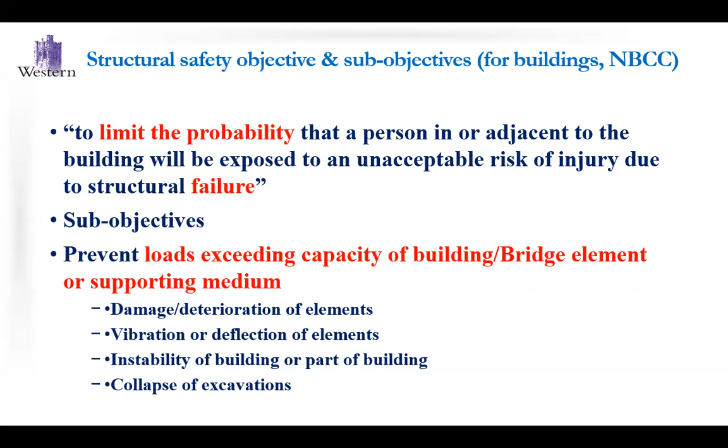National building codes are most often focused on structures, or loading on structures, rather than foundations. I think the new version, NBCC 2025, will include many more things related to foundations. I'm going to only talk about the structure part, and remember that we are often talking about the structural element rather than the structural system, because the structural system is much more complicated than a structural element.

Okay, so the key points for calibrating a design code are three. You need to identify the limit state function. So what is the limit state? Capacity versus demand, resistance of a structural member versus load effects on a structural member. That's the limit state, okay? We need the selection or assignment of probability models of random variables. In other words, we need to state the distribution of a random variable.

For example, wind speed, how it is distributed. We cannot precisely predict the extreme wind during the year, so we must somehow get data and assign the distribution. The third task in design code calibration is we need to set an objective. Okay? What is the objective? The objective is a reliability index or tolerable failure probability.

A long time ago, one of my colleagues corrected me. I cannot say target failure probability. We are not targeting failure. We are getting a tolerable failure probability.

An illustration of those three is shown here. You have factored design load less than or equal to factored design resistance, R being resistance, L being load. You can think of this curve as representing the load effects and this one the resistance. When you pull these two curves away from each other, the failure probability decreases. When you get these two close to each other, the failure probability increases.

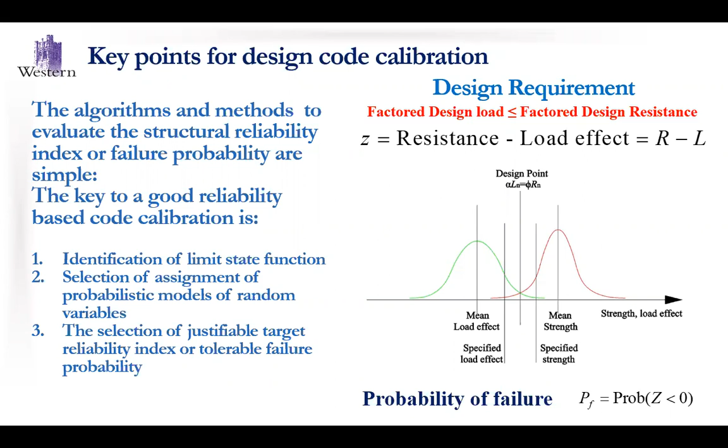How to calculate this probability of failure is a little bit more scary. If load and resistance are defined by this limit state function, the chance of failure, if they are normally distributed, can be expressed this way. This represents the mean of resistance, mean of load effects, standard deviation of resistance, standard deviation of load effects. Beta is known as the reliability index.

Nothing is that easy in life. Sometimes you have a log-normally distributed random variable. In case you have log-normally distributed resistance and load effects, the reliability index can be calculated approximately by this equation. One thing you observe is that the reliability or safety of your structure is controlled by the coefficient of variation of load effects. That's important. Of course, it is also controlled by the mean values. Mean value, we have better control of, perhaps. The coefficient of variation, we don't know how to deal with, and we need to figure it out.

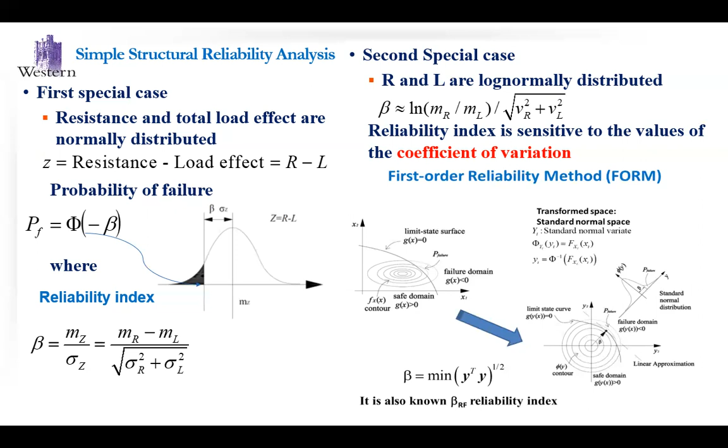This plot shows a more sophisticated approach to calculate the chance of failure. Details of that I will not talk about. Essentially, you have a limit state function. You are in a space which is not normal, and you map to standard normal space, and in standard normal space, you figure out the distance called beta, the reliability index, and use that as a measure of reliability. As long as we understand this beta, we are okay.

If you do not like thinking analytically, you can think of it as follows: you have dead load, you have dead load renovation, so your dead load changes. On top of that, you have sustained live load, snow load, changes in live load, and wind load. You put all of them together and repeat this process for a long time, let's say 50 years, again and again, and you figure out the chance of exceeding the maximal design level or a specified resistance. You do this using the Monte Carlo technique. We are not gambling, okay? This is simply a numerical exercise to figure out the chance of failure.

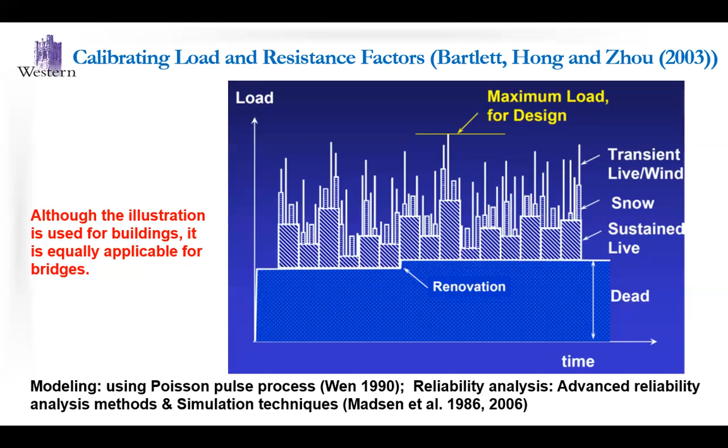For example, for the old NBCC, the calibration was carried out by Bartlett, Hong, and Dr. Zhou, and the load factors were implemented, I think, in 2005. Calculating these involves a lot of mathematics, one of which is the Poisson pulse process, shown here. You need a mathematical model to do the simulation, and once you've done the simulation, you can calculate the chance of failure.

Now let's focus on the limit state function with a bunch of random variables: dead load, live load, wind load, earthquake load, and so on. The design requirement is that the factored resistance must be larger than or equal to the factored load. The third thing needed to carry out reliability-based calibration is the target reliability index. Here, the target reliability index is 3.5 with its corresponding failure probability.

When we translate that, we need to consider that the dead load remains constant during the service period. So the annual failure probabilities for the first, second, third year are partially correlated, because the dead load remains the same, although it's unknown. Translating 30 years to 50 years, 3.5 becomes 3.36. So roughly, a reliability index of 3.0 is used for the National Building Code of Canada calibration. For the bridge design code it is slightly different: 3.5 for 75 years.

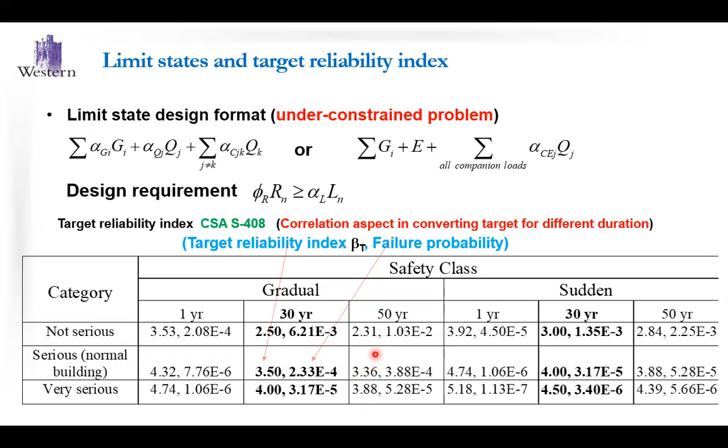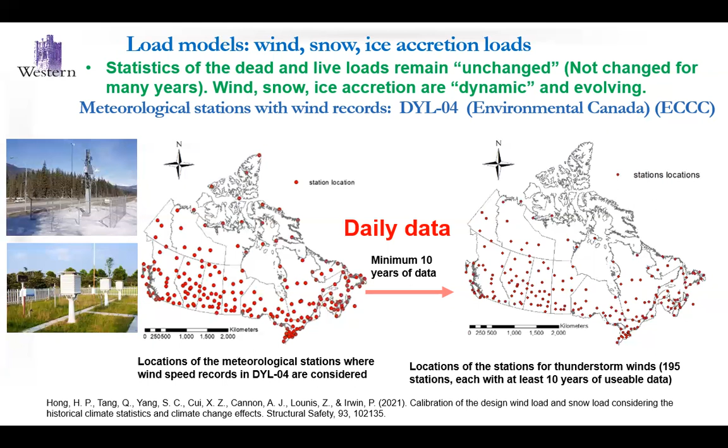In this case, DYL is daily data. In other words, you have only one data point for each station during a day. You can also have HYL01, which is hourly data, and these are the stations. Usually there are more than 250 stations that have sufficient data you can use, because we want to carry out extreme value analysis, and we need at least 20 years of usable data. Without that, there is huge uncertainty in the assigned distribution for wind speed.

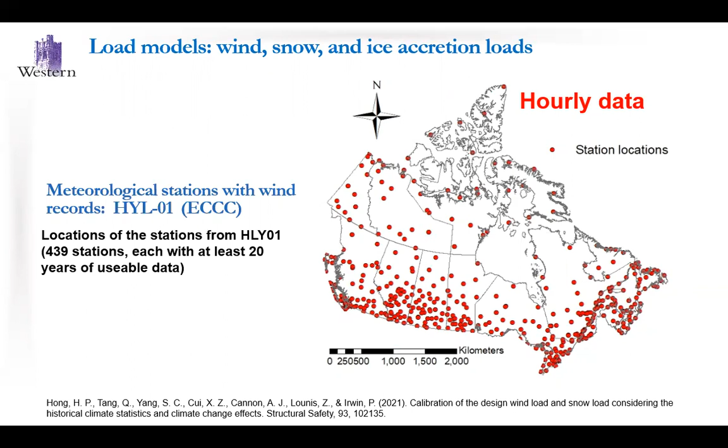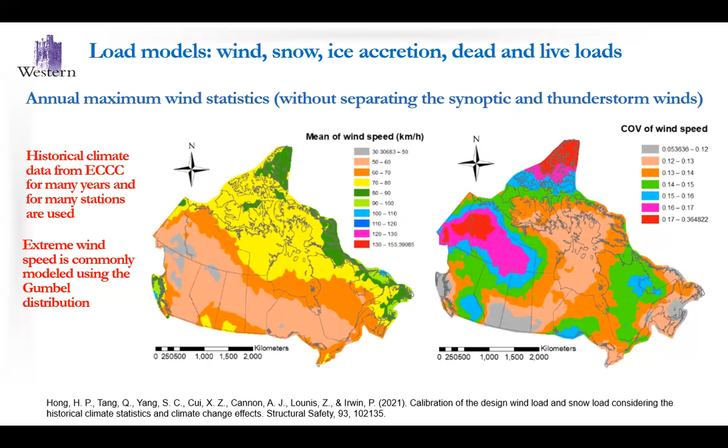We carry out a statistical analysis, and this shows the trend for the mean wind speed and the coefficient of variation of mean wind speed. As you can see, the coefficient of variation varies from location to location, from about 0.05 to about 0.3. And we mentioned that the reliability index depends on the coefficient of variation.

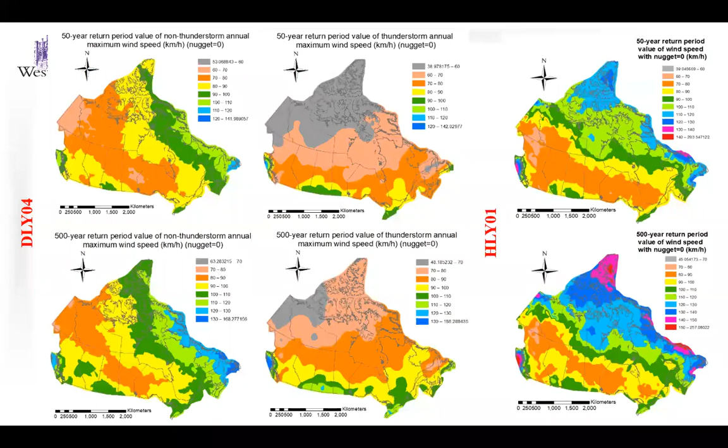What is the 50-year return period? What is the 500-year return period? Essentially, for the 50-year return period, the chance that the wind speed you observe in a year is higher than that value is 1 divided by 50. So 2% per year. And for 500 years, the chance of exceeding it is 0.2% per year. That's roughly it.

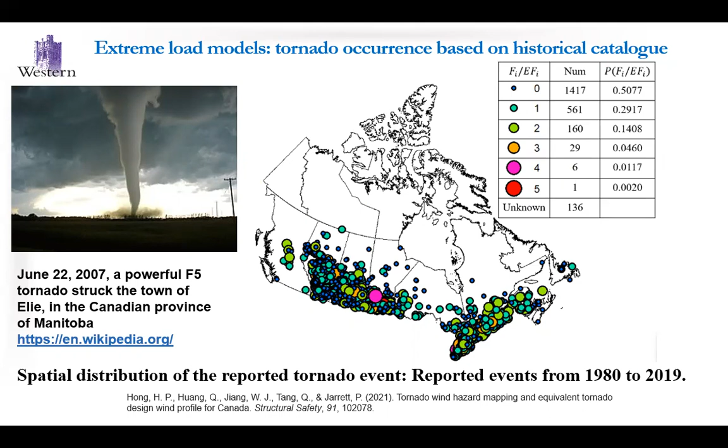We also like to see these kinds of maps. We don't want to experience these kinds of things. And this is, I believe, the only F5 tornado that has been observed in Canada, and it happened in Elie, Manitoba. Now, the statistics of tornadoes are shown here. There are a lot of tornadoes, fewer than the US, but there are a lot. Why are we interested in that? There are a couple of things.

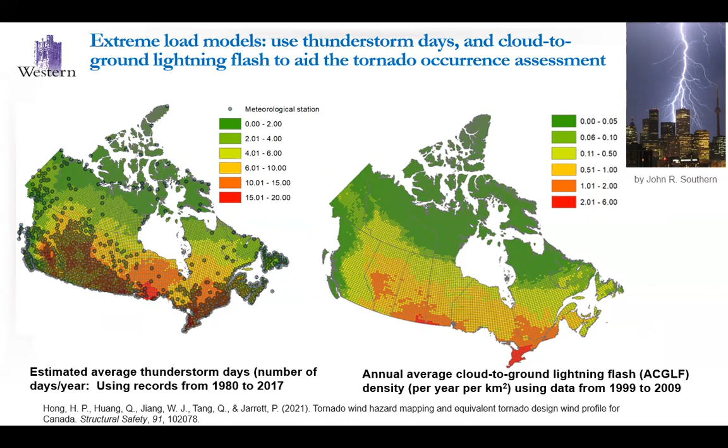The tornado catalog is incomplete because Canada is huge, and some places may not have people living there. They may have tornadoes, and we need to figure out whether there are or aren't, using other parameters that give us an indication. One of them is the number of days with thunderstorms, and the other is lightning. We include thunderstorm days and lightning data to evaluate the occurrence of tornadoes.

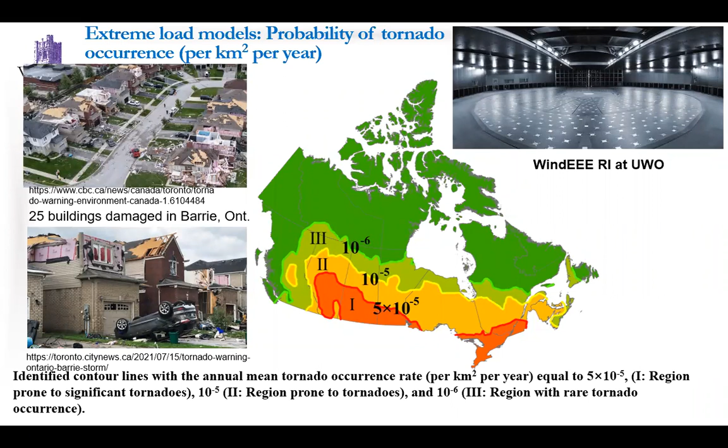So the summary is that if you are living in the red areas, tornado occurrence is higher. Yellow and green, less and less. As you move north, there's no tornado. If you ask me whether in the future there will be more tornadoes due to climate change, I simply don't know. Perhaps warming temperatures move some tornado systems to Canada from the US, perhaps increasing them, but I do not know. Okay, those are based on historical data.

We compare the hazard due to tornado wind and the regular wind, like synoptic and thunderstorm wind. We find that these are much less than the 500-year return period value of synoptic wind. One may therefore think that tornado wind is not significant. So what we can say is tornado is not important for Canada, but there's a caveat to that.

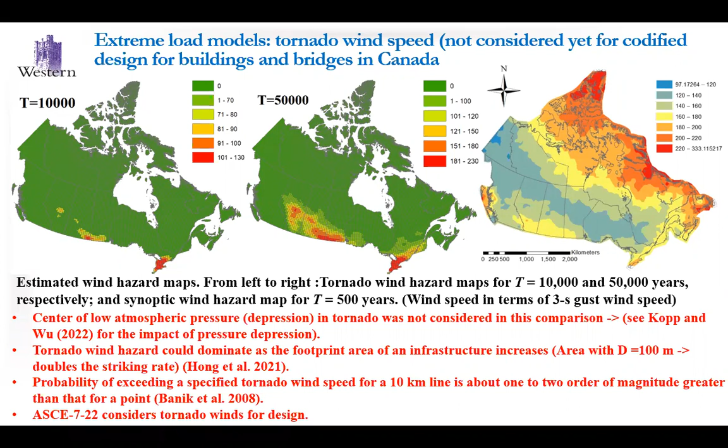There is one more thing: ASCE 7-22 considers tornado winds for design. In Canada, we don't consider them. So it's likely all these things will impact the future Canadian design code. When I say future Canadian design code, I'm not talking about 2025. It's too late. They work in about 5-year cycles, and by the middle of the 5 years, everything needs to be done. Public consultation, voting, democratic process, and so on. And then the code will come out. So if you are working on things for 2030, now you need to speed up and try to get things in for discussion.

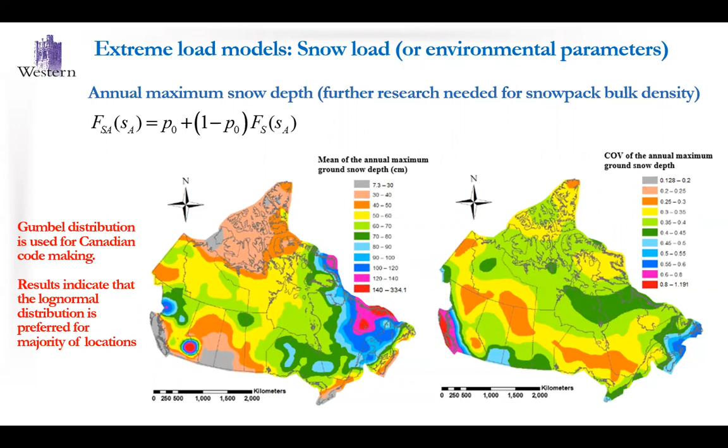Okay, snow load. Just to show you the snow load map, and one of the things I wanted to show is that the coefficient of variation varies much more significantly. That's ground snow depth. The depth alone does not give us loading. The depth times the snowpack bulk density gives us the weight, the ground snow load. The mapping of these is usually carried out using something called kriging, just spatial smoothing. And as you can see, the 50, 500-year and 1,000-year maps are shown here.

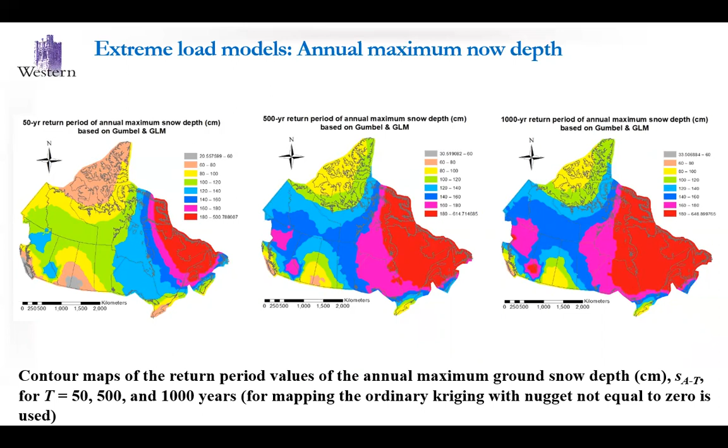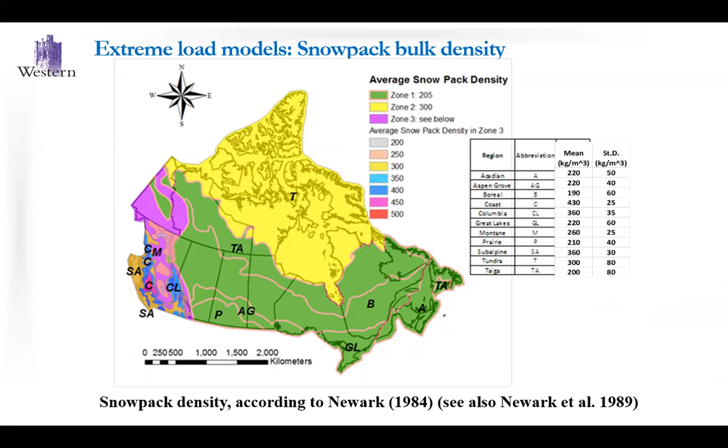One of the things I wanted to mention is that in Canada, the Gumbel distribution is often used. In the US, they use the generalized Pareto model. And we found that the lognormal is perhaps even simpler and better, but it's still debatable which one to use. The code committee says Gumbel should be used because of tradition.

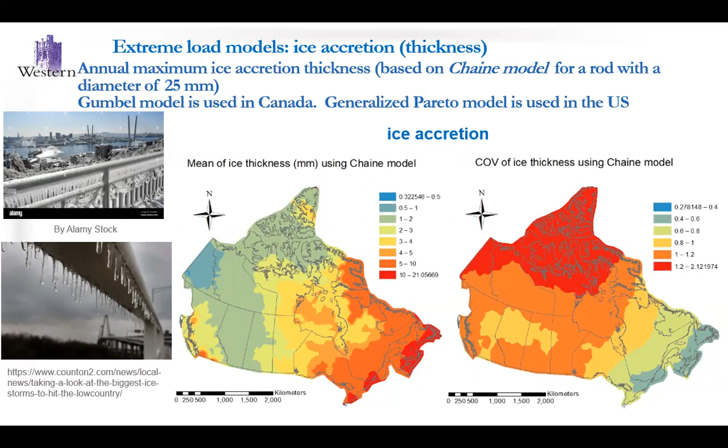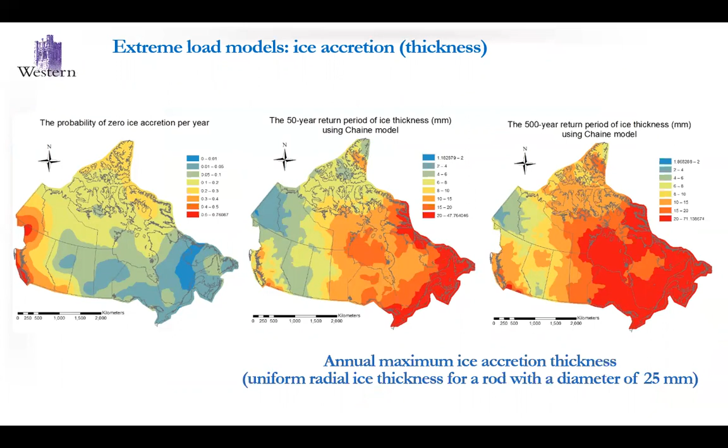So this shows the variation of ice thickness. And as you can see, this area has more ice than the west, so colder and warmer. This is a comparison of existing ice thickness in S6, which is the bridge design code, and C22.3, which is for transmission lines.

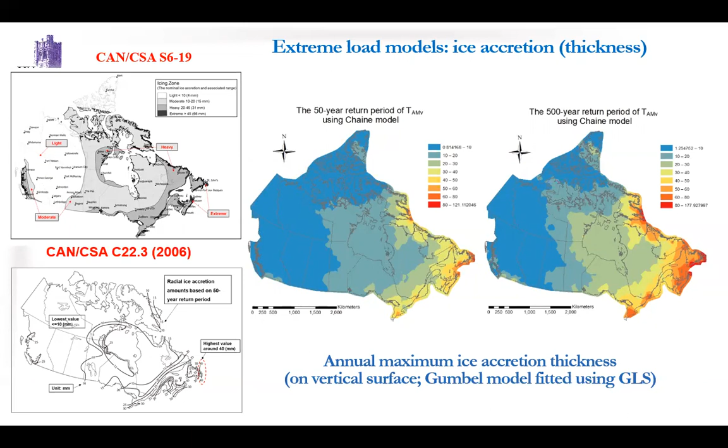Okay. What we obtained is slightly different than what is shown in the design code. And it's debatable which one is preferred, and this needs to be further discussed. Okay. Now we identified the models for the environmental load parameters. Now we need to identify the limit state function or load combination in the National Building Code of Canada, and try to see what is the reliability.

The calibration of those things, which are included here, you can find in the paper by Bartlett, Hong, and Zhou, I think in 2003. There were two interesting papers. All the statistics used for resistance are still used, and the load effects perhaps change slightly.

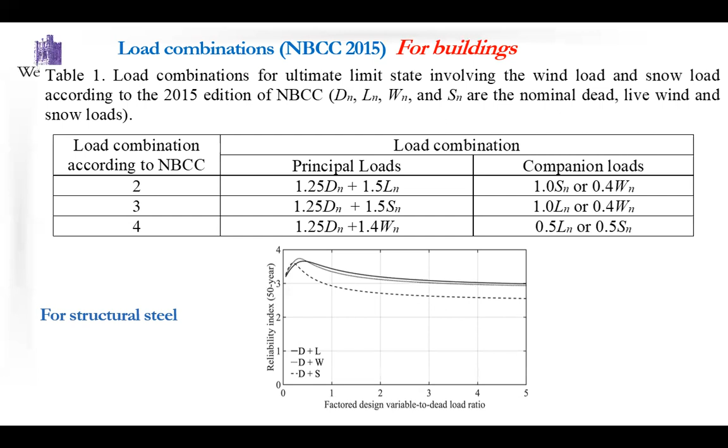The point that I wanted to make is that dead plus live, dead plus wind, dead plus snow, no matter which one you use, following the code it is about 3. Target reliability is about 3, and it's achieved. It's okay. So a little bit higher, it's okay. So this confirms as long as you use a typical coefficient of variation, everything is fine.

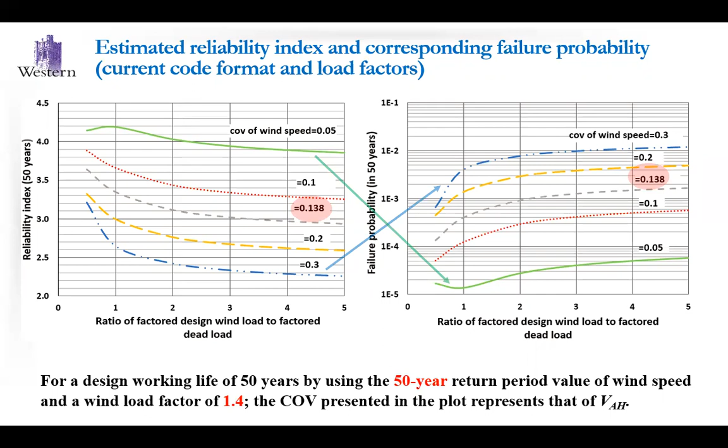However, if you are using the coefficient of variation of wind speed from 0.05 to 0.3, which is the range for Canada, you will find out the probability of failure has about 2 orders of magnitude difference. It's huge. And this is based on a 50-year return period and 1.4 wind load factor. However, if you use a 500-year return period value with load factor 1.0, this range is much narrower, and the difference between the failure probability is within an order of magnitude.

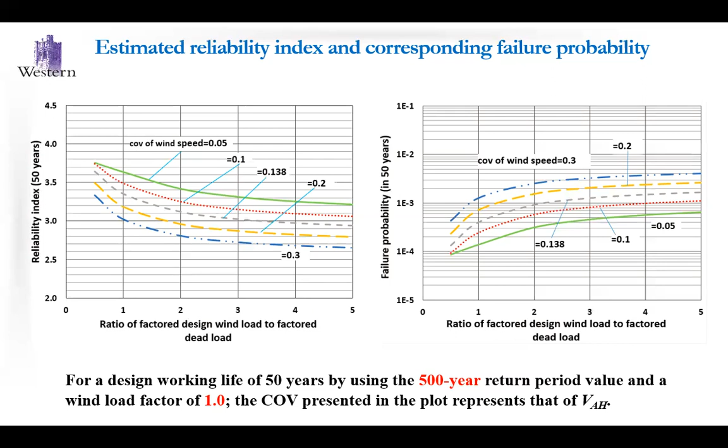So the story is that if you are using the existing code, if you are designing for Vancouver or, I don't know, for Halifax, the chance of failure will be significantly different. For some locations, maybe up to 2 orders of magnitude difference. If you're using the new format, the difference perhaps is less than an order of magnitude. So it's drastically reduced, and hence the reliability consistency.

Now, this project did not stop at using historic data. We need to move on with climate change. And the climate scientists tell us, depending on the representative concentration pathway, you may get something like this for the temperature change, or something like this, depending on which scenario you are using. So RCP 2.6 and 8.5 are often considered.

The meaning of 2.6 and 8.5 is a possible range of radiative forcing value in the year 2100, 2.6 or 8.5 watts per meter squared. That's what it's trying to say. But for us civil engineers, the climatologists tell us the likely scenario will be 8.5 or 2.6. We just adopt it and use it.

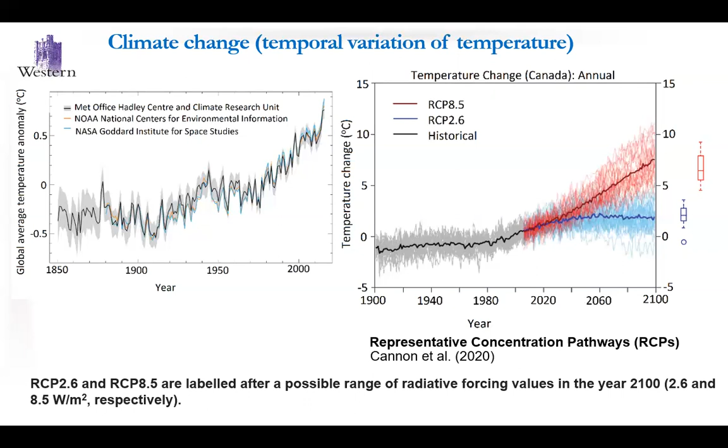Okay. Cannon and others carried out significant analysis using many of the climate models and concluded a few things for Canada that are interesting to us. First of all, if RCP is 8.5, the temperature increase you can get versus time increment since 2000. And this is the temperature change for Canada. Once you have that, you can have the change in the mean of annual maximum wind speed, and the change in the COV, coefficient of variation of maximum wind speed.

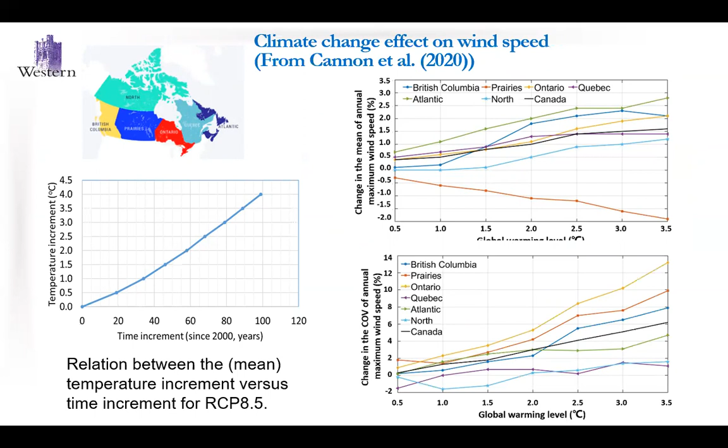You consider this, and you say, I still want the target reliability index β50 to be 3. What is the adjustment factor for the wind load? It is safe to say less than 1.07. However, if you say at any given year, my reliability index should satisfy a minimum that is what is observed now without climate change, this value ranges from about 1.02 to 1.12 roughly.

So we come to the conclusion that a climate change scaling factor of 1.07 could be conservative for Canada. Now, whether this number or any other number is accepted depends on the voting process. We, as researchers, just provide the information to the code committee and explain what we find, and the code committee will vote or voice their thoughts and finally determine which one we should use.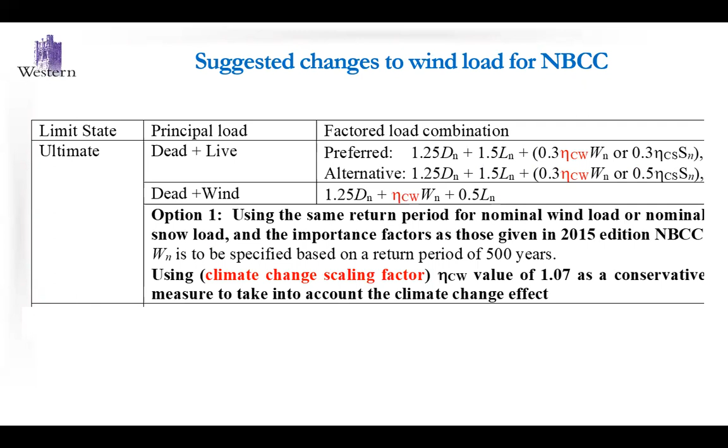Okay, so the eta CW should be used in the load combination when wind load is the dominant loading. We carry out the same analysis using the current design code and by considering a return period of 1,225 years for snow load. And these are the comparisons of the reliability index.

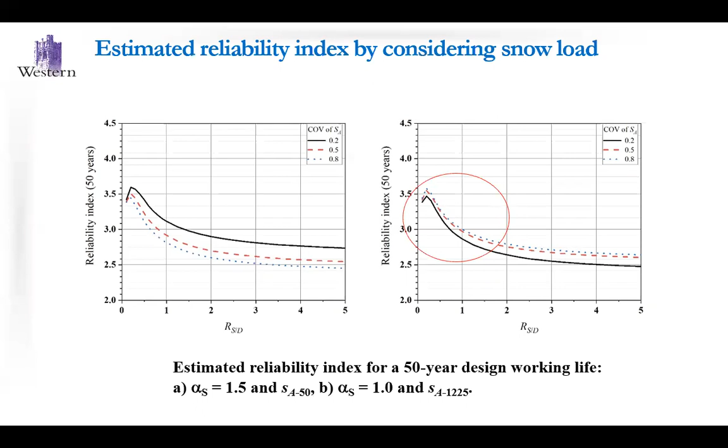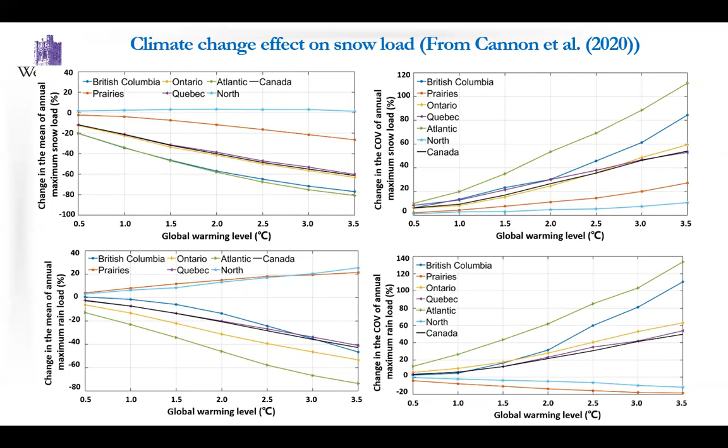Once we have those changes, we carry out reliability analysis and we figured out these are the values we need to adjust for the snow load. It depends on which objective you want to achieve: you want the target in 50 years, or you want the target at each year to at least satisfy this requirement.

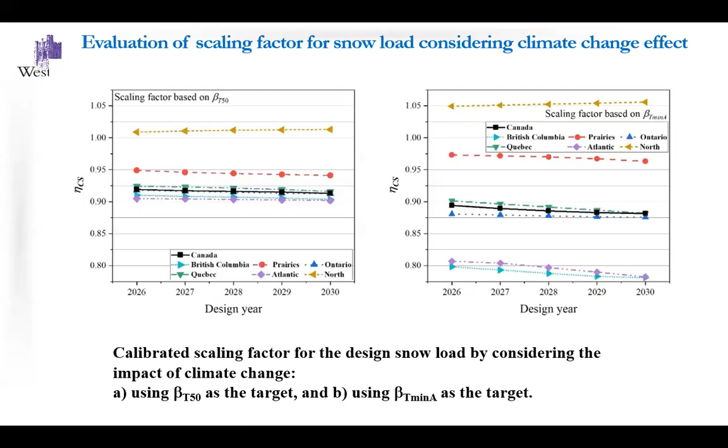You may notice that in most places, the snow load will not increase but decrease. Of course, you can think about that: the temperature increases, there will be less snow, consequently the snow load is less. Okay. So the conclusion, or suggestion we come up with, is as follows: the climate scaling factor equal to 1 except for north, which is 1.05. So we are a little bit conservative.

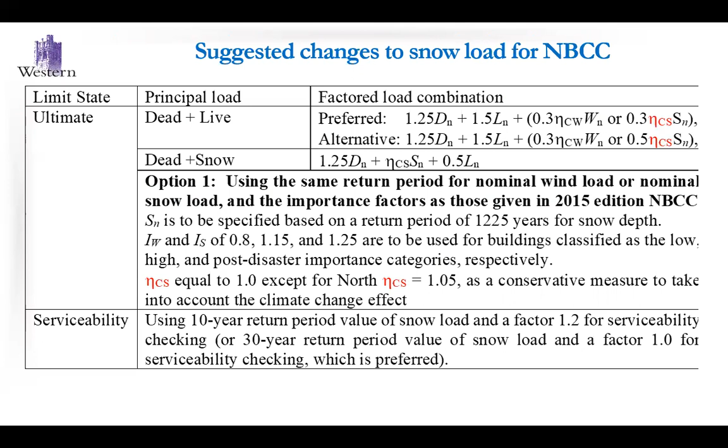Now I'm going to move to CHBDC, the Highway Bridge Design Code. As you can see, in the Highway Bridge Design Code the dead load factor changes. It depends on which component of the dead load you are interested in. Asphalt usually you cannot control very well, and that load parameter will increase. You have live load, wind load, ice loading. Ice loading is 1.3 load factor, and the combination factor is 0.75. There is a small print; I'm not going to read it.

So if you are designing the bridge, you need to consider whether the bridge has a span longer than 125 meters or less than 125 meters. There is a debate where that number comes from. Some simply say it came out of a bunch of guys' heads. There is no specific objective criteria to define 125, but that's set in the design code.

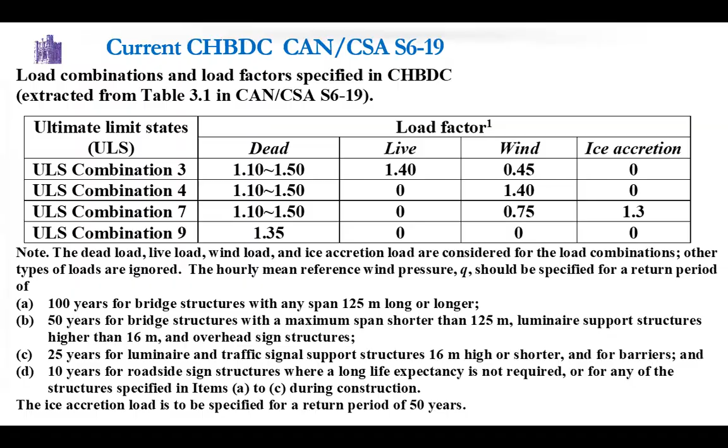Again, for those who already took wind engineering courses, you know this department is famous partly because of the late Professor Alan Davenport, who is considered the father of modern wind engineering. According to him, the wind load is a wind load chain that you can define using gust spectrum, aerodynamic admittance, aerodynamic force spectrum, mechanical admittance, and the response. In terms of the equation, wind load is equal to the coefficient, exposure coefficient, gust factor, and the drag coefficient. VT is the mean wind speed.

One of the things that I should warn you is do not mix US code with Canadian code. US code uses 3-second gust wind speed. Canadian code uses hourly mean wind speed. Either you use the complete US code or the Canadian code, but if you use half and half, you will be getting into a lot of trouble.

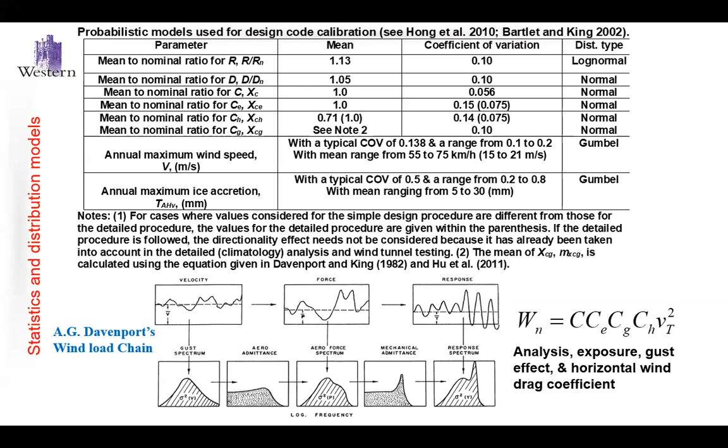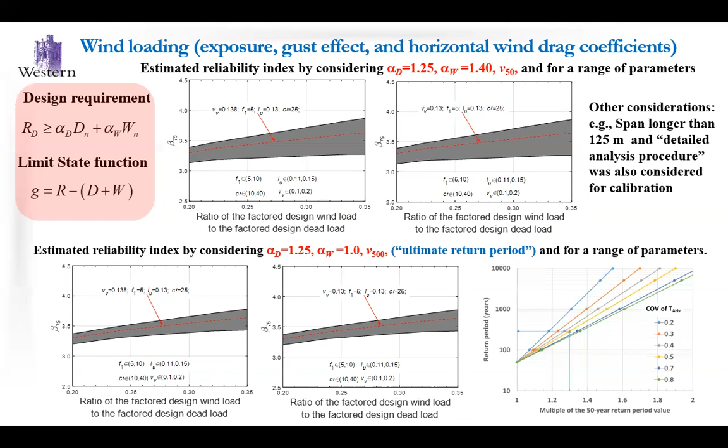We carry out calibration using a bunch of parameters to define different short span bridges, and using the current design code, this is the reliability index range. If I use a wind load factor of 1.0 and the wind speed of 500 years, this range is narrow, as shown here, and consequently these values are suggested. It's understandable. The wind load factor is 1.4; take the square root of 1.4, it is about 1.1 something. You go up for a particular case of wind speed. I think this is the wrong one. Anyway, go up the distribution with coefficient of variation of 13 or 13.8, and it comes out roughly about 500 years. So this essentially justifies this is adequate.

This I already showed to you due to climate change. One of the issues to be worried about is that in the National Building Code Committee, the committee voted 8.5 for RCP. But in the Bridge Design Code, they voted 6.0. Why? They voted, okay, democratic process. They consider owners' and operators' interest and public safety, and they believe this is adequate.

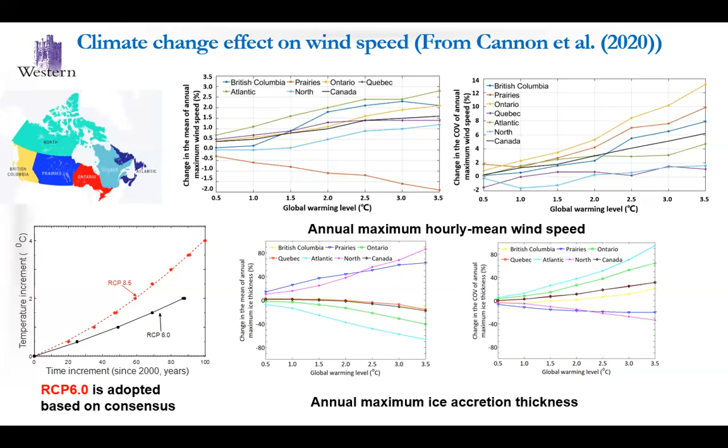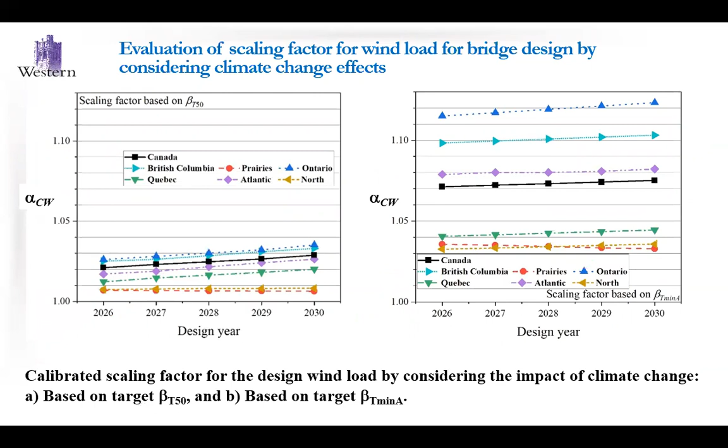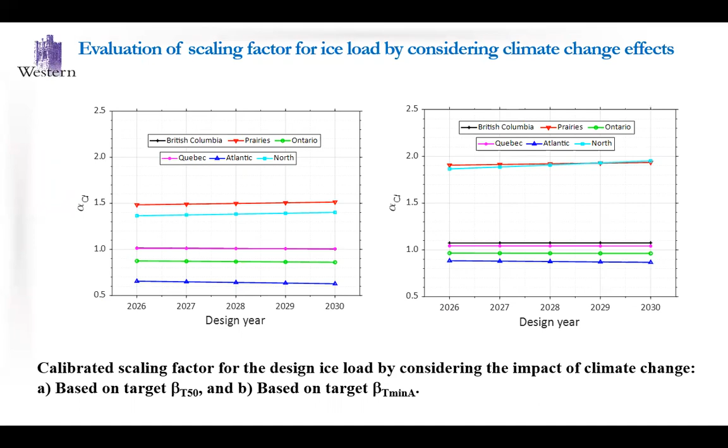So carry out the calibration, and again, you get a scaling factor. Here, instead of beta, now we use alpha, but I'm going to change it later on. For ice, we do the same. We can come up with values that take into account the climate change. So the revised suggested load factors that you need to use are as follows. As you can see, instead of 1.4, now it's 1; 1.3 is 1, and the load combination factor has been changed. The interesting thing here is that a wind load scaling factor of 1.05 is suggested, and a regionally dependent ice load factor for British Columbia and Quebec, and so on and so forth.

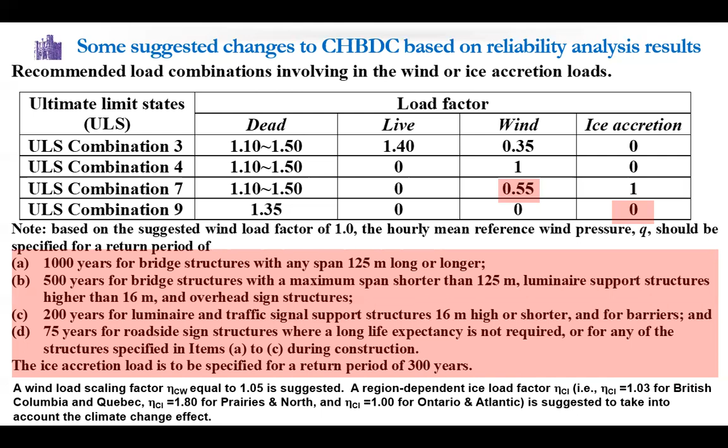I must say some of this for the Prairies is still being debated. The reason is that the data obtained from Environment Canada define the Prairie provinces as a single region. Perhaps it's better to define it as two regions, one south, one north. South is kind of warmer than the north. The 1.8, an 80% increase, sounds scary, but it's not that important. To begin with, the ice thickness for, let's say, north of Manitoba is 2 or 3 millimeters. You increase 80%, 6 millimeters. It's still very small, doesn't dominate. But for the south, an increase of 80% may be a concern. So we will take further scrutiny on this one.

Okay, so I'm almost done. The take-home is as follows. Reliability analysis is not something that scary. It's just a manipulation of probability. You need to consider the target reliability index for design calibration for Canada: 3.0 for 50 years for the National Building Code of Canada. It was adopted before and we still use it. For bridge design, we use 3.5, but for 75 years, okay? You cannot use a reliability index for 1 year and say that's for 50 years. They're totally different.

It is shown that the use of a load factor of 1.0 with the nominal loads defined based on the ultimate return period is preferred for improved reliability consistency. So we are not crazy, okay? We are saying the wind load needs to be defined based on a 500-year return period. You think about it, it's 0.2% exceedance in every year.

The reason we believe using 1.4 with 50 years is not adequate is that in such a format you cannot take into account the spatially varying coefficient of variation. And using 1.0 with 500 years, for example, for wind would be better. Of course, we suggested it for snow and ice loading as well.

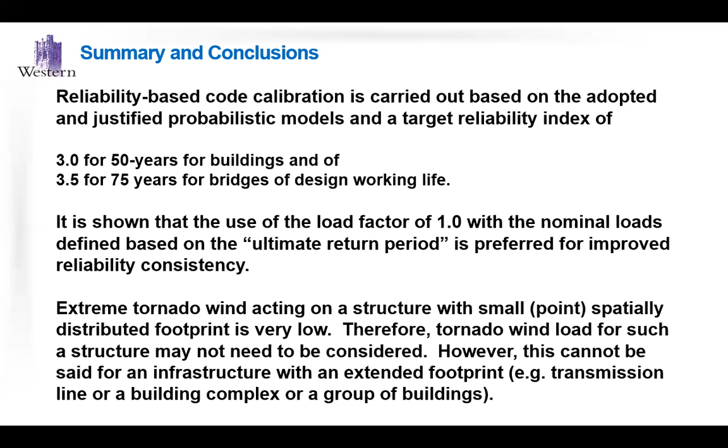So I showed the new sets of design loads and the load combinations, and some of these are currently under discussion. And you know, the discussion sometimes says yes, and don't forget what was discussed, they come back again, and so on and so forth. So this, I would say, is still under discussion. But if changes happen, they will be in 2025. Of course, the 2020 code came out late, at least by 1 year. The commentary came out late by 2 years. So perhaps the 2025 code will come out in 2026.

I don't know. Okay. And based on the climate change effects and the reliability analysis, climate change scaling factors for wind load, snow load, and ice load are recommended. I believe that such type of implementation is easy to deal with. You only consider a scaling factor, most often about 5%. And the details are shown in the table. So the code will be the same format, except that the load factor changes slightly.